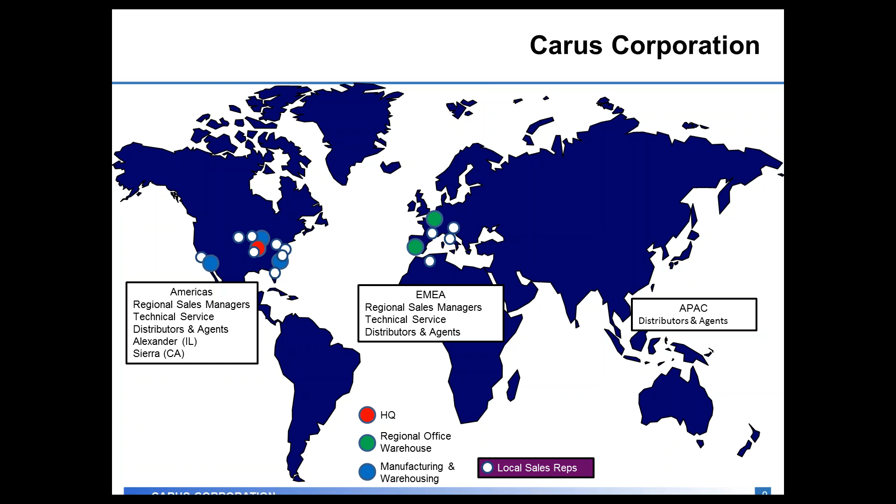So the rule that governs what we're going to talk about today is the US EPA lead and copper rule that was put into effect on June 7th of 1991. What it said at that time was what the current action levels for lead and copper would be. At the time, the lead action level was 0.015 milligrams per liter, or usually you'll hear it referred to as 15 parts per billion. And for copper, the action level was 1.3 milligrams per liter.

That original document actually set goals as well and said the maximum contaminant level goals for those two compounds. For lead, it was 0, and copper was 1.3. So in the case of copper, the action level and the goal were the same, but with lead, it said that the action level was 15 parts per billion, while your goal would be 0.

With the recent news with Flint in the last 2 years in the media, you've heard many people say that there's no acceptable level of lead. Well, they're using this old document and the goal and saying that the goal was always supposed to be 0 to say that's why none would be acceptable in the field.

The reason the lead and copper rule was put into place was because of the issues that lead causes in the delays of physical and mental development of children. It can also cause kidney problems and high blood pressure in adults. Copper causes stomach, liver, and kidney problems. So there were reasons behind putting the lead and copper rule into effect.

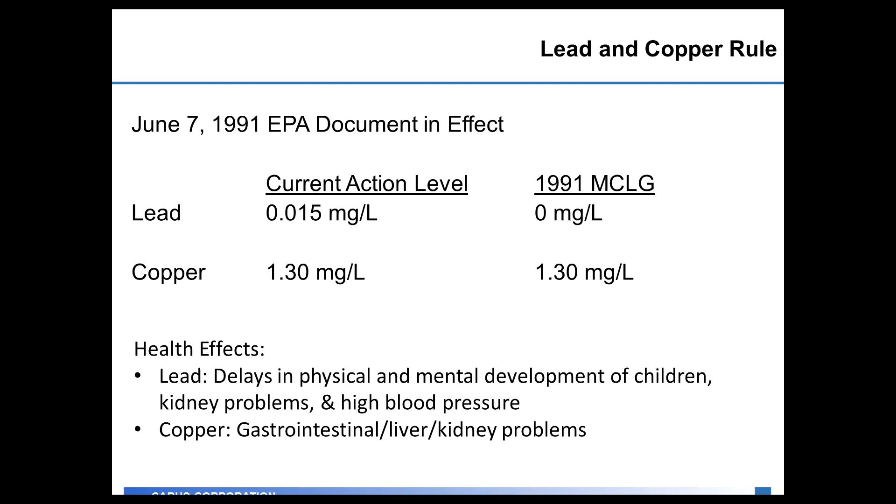The lead and copper rule is different from most regulations because it's an action level, which is different than a maximum contaminant level. In the case of an MCL, you can have no sample that's above the limit. In the case of an action level, you only need 90% of your samples in the distribution system to comply with the regulation. You're allowed to have 10% that are above the regulation.

So the easiest way when you're doing your lead and copper rule numbers is to take all those samples, put them in a spreadsheet, sort them from highest to lowest, and go 9/10 of the way up the list, and that's what your action level is, and that determines if you're in compliance.

The monitoring for the lead and copper rule is based on the size of the distribution system and the high-risk sites that you have out in the distribution system. High-risk sites would be places where you know you have lead service lines or you have copper plumbing in the consumer's home that has lead solder.

The original frequency is every 6 months for additional monitoring of the lead and copper rule. If you meet the action level, systems consistently meeting it can reduce the monitoring to once a year. If you continue to meet the regulation, you will then cut your number of samples in half. And then finally, as you continue to be in compliance, it goes to once every 3 years and half the number of samples that you need to pull in the system.

So there are benefits of getting the lead and copper in your system under control because it's less testing and half the number of samples.

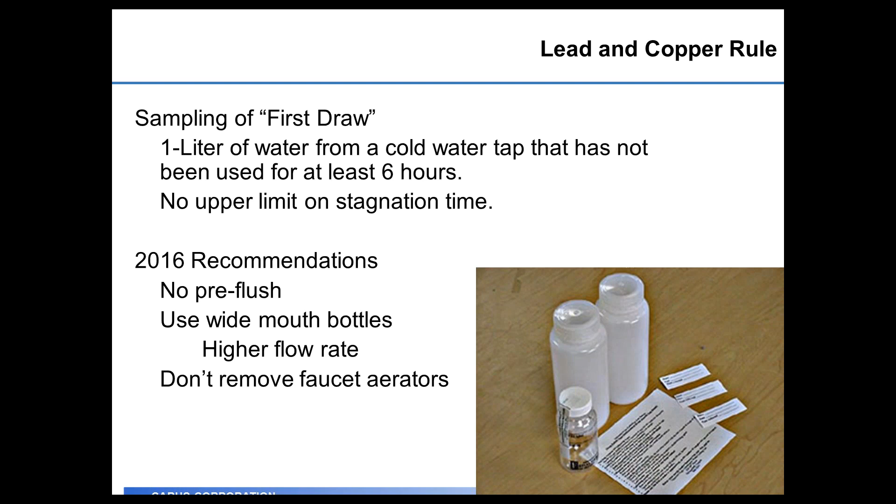And then finally, they recommend that you don't remove the faucet aerator from the consumer's tap before they pull that sample. You want the sample collected like they normally would when they wake up in the morning and drink from the kitchen or the bathroom sink. And those were the recommendations.

If you have a violation of the lead and copper rule, after the exceedance occurs, you need to do a distribution of public education, so notifying the public that you've had that exceedance. What happens is you go back to increased monitoring of consumer taps. So you go back to monitoring every 6 months and the full number of samples. In addition, you're required to develop and submit a corrosion control plan to your state regulatory agency of how you're going to get back into compliance.

That corrosion control plan can include how you would adjust the pH, the alkalinity, the hardness, or if you're going to add a corrosion inhibitor or change the dosage on the corrosion inhibitor. The lead and copper rule also lays out that you can choose an alternate way of compliance of doing lead service line replacement rather than doing a corrosion control plan.

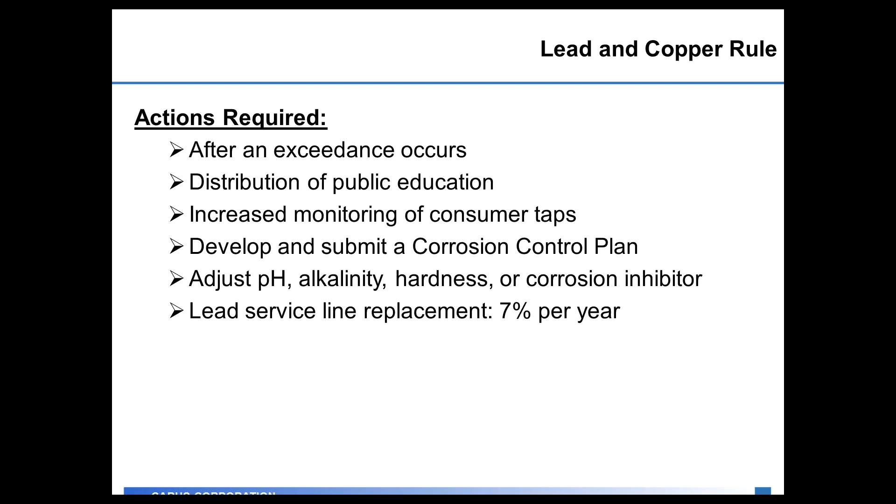If you choose the path of lead service line replacement, the regulation states that you must replace at least 7% of the lead service lines per year until you have them all removed from your system as a path forward. All these things will be up for debate when the new US EPA lead and copper rule comes out. It's tentatively set to be released in early 2018.

Are you seeing an increased cost to pumping water through your pipe? As that pipe gets restricted with scale and tuberculation, it costs you more in energy to pump the same amount of water through the pipe when that scale and tuberculation builds up.

Do you have an increased chlorine demand in your distribution system? You're feeding your chlorine at the plant. Do you have to boost it out in the distribution system to maintain that residual in the system? Do you have places where the residual drops off frequently? Those are all good hallmarks that you might have issues with corrosion in that part of the distribution system.

Have you had any issues with bacterial regrowth or hits with bacteria out in the distribution system? Bacteria can be a major form of causing corrosion out there in the distribution system. Do you have a lot of issues with dirty water, red water complaints in the distribution system, and you're sending your team out to flush the fire hydrants frequently?

And when they do that flushing, do they have to flush the fire hydrants for 5 minutes, 10 minutes, 30 minutes? The longer that you have to flush the fire hydrant until you get clean water is a good hallmark that you have a lot of corrosion going on out in your distribution system. Obviously, leaks and main breaks would tell you you have severe issues with corrosion in your distribution system because now the pipe is actually corroded so much that it's caused a crack and you're leaking water out into the ground, and you have to do replacement of those.

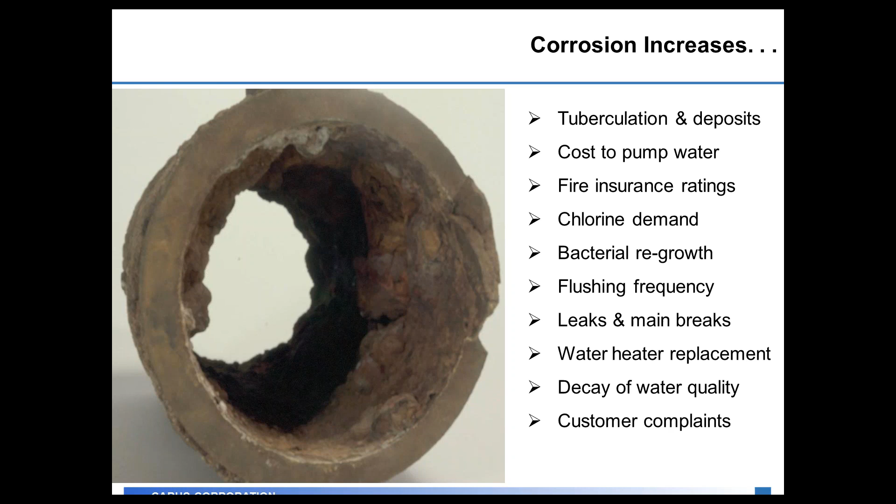In addition to pH, alkalinity is another important factor to measure. Alkalinity helps you form the calcium carbonate coating out in the distribution system, and it also acts as a buffering agent for your water, which helps you keep your pH at a stable level throughout the distribution system. Systems that have low alkalinity typically can see pH swings in the distribution system, where water leaving the plant will be at one pH, and depending on what's going on in the distribution system, it'll either swing higher or lower depending on what type of corrosion byproducts they have in the system.

Some other products you'll look at is DO, dissolved oxygen, which would increase the rate of corrosion in your distribution system. Chlorine residual, or nowadays you also see chloramine residual. Chlorine residual specifically increases metallic corrosion in the system, and chloramine residual is less effective at removing biofilms from a distribution system versus free chlorine. So there can be differences in how those work in the distribution system.

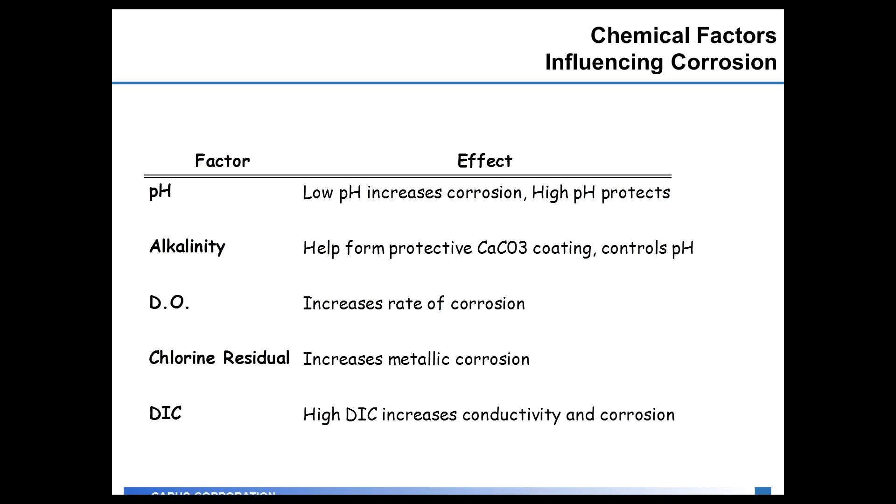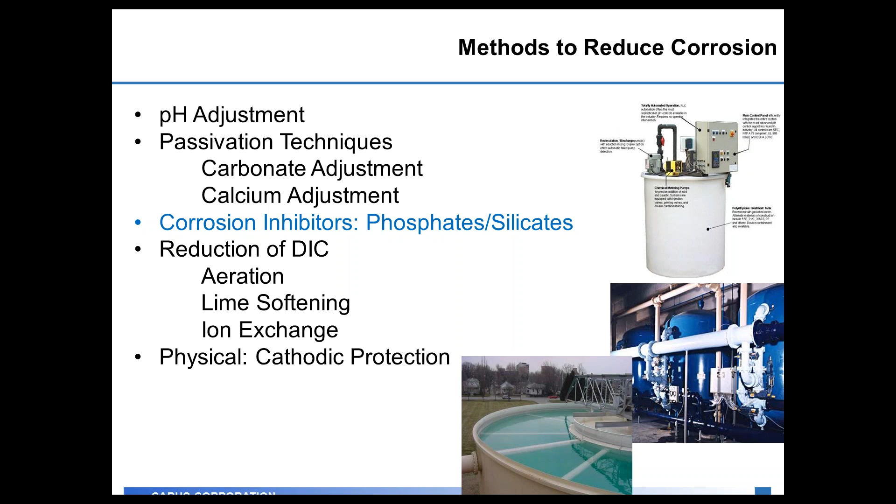Generally, phosphates in water treatment are used for two main applications. They're used for corrosion control, which would be lead and copper, and also red water complaints. And they're also used for sequestration, which would be color control, scale control. The last time that AwwaRF did a study on this was in 2001, and 56% of all water utilities in the US use some type of phosphate-based corrosion control / sequestration. At that time, they said roughly $200 million was spent a year on phosphate products, but it resulted in a $4 billion savings for these water plants, which was a 20-fold return on investment.

How AwwaRF came about those numbers was they had the cost of the phosphate products, but to get the savings, they added up all the things that a water plant would normally do when responding to a customer complaint. This could be going out and collecting water samples, the additional testing they would do, the other treatment chemicals that they would use in the plant. Did they have water mains and leaks? Did they do more flushing? All those things have a cost associated with them, and they added those up, and that's how they came to the $4 billion in savings.

At the time of the study, and even today, there's a wide range of costs for phosphate products in the market. Depending on what type of phosphate you're using, the cost can be anywhere from 30 cents to $2 a pound, or 1 cent to 10 cents per 1,000 gallons of water treated.

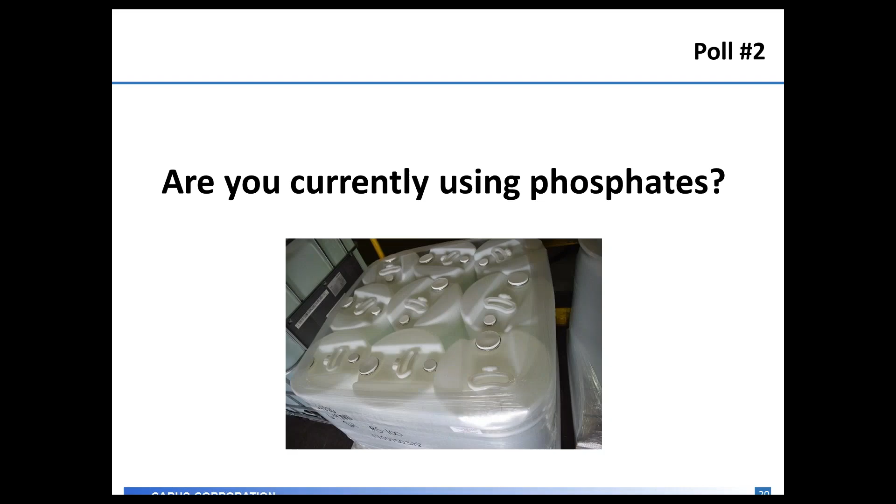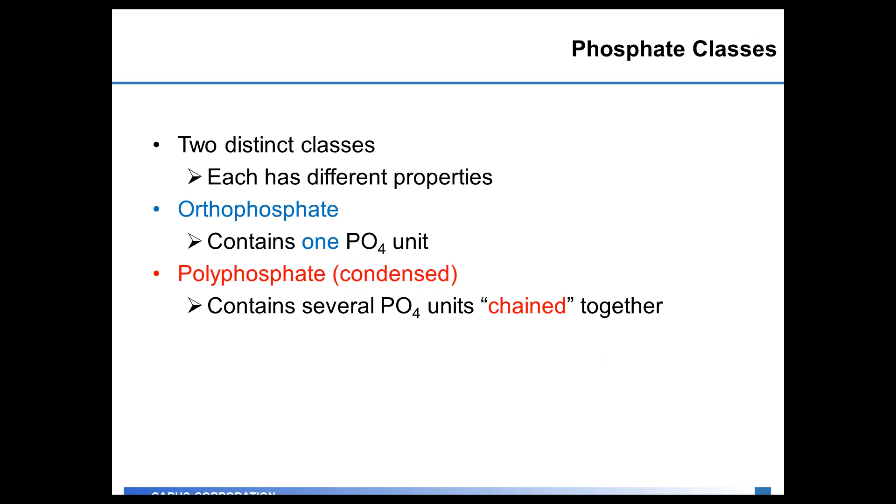So when we talk about these phosphate classes, there's two very distinct classes. Orthophosphate, which contains one PO4 unit, and polyphosphate, which is also sometimes referred to as condensed phosphate, which contains several PO4 units chained together. So orthophosphate, like I said, is just one PO4 unit by itself.

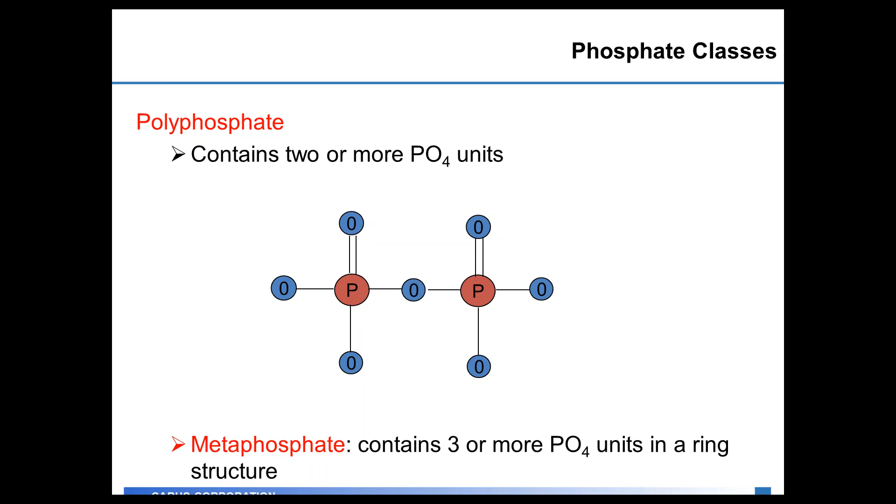There's been a lot of research done over the years on the corrosion control mechanisms involved with phosphates. What we do know is that phosphates form films over pipes or metals out there in the distribution system. They are anodic film formers. So the orthophosphate is slightly negatively charged and forms a film on the inside of the pipe by attaching to the metal.

Polyphosphates can also act as a cathodic inhibitor, and they provide a barrier between the metal pipe surface and oxygen to prevent that interaction of the oxygen with the metal pipe surface. The research has shown that these thin films are very insoluble phosphate salts, and we are still doing research today on how these films form, how long they stay active, and what are good levels of phosphate to feed in the distribution system.

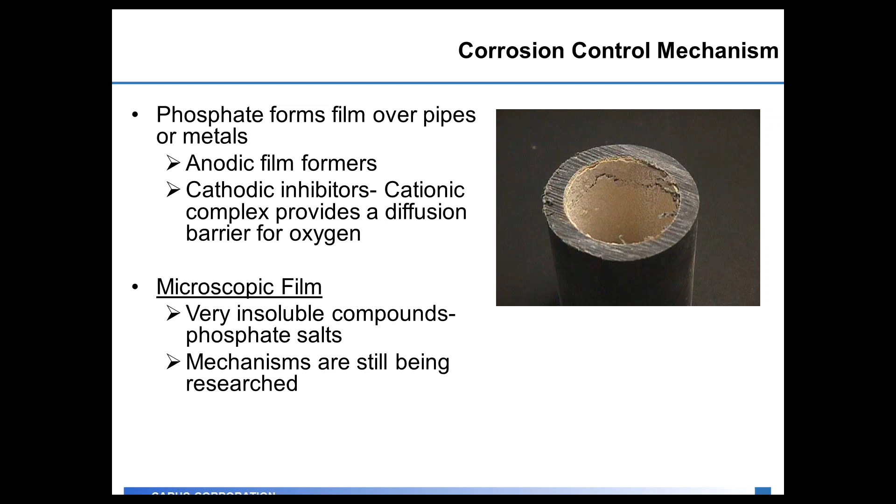The orthophosphate research that you can find out there today talks about orthophosphate precipitating with the 2+ valence metals. So that would be the calcium, the magnesium, the lead and copper pipe, and the iron and manganese you would have in your distribution system. Michael Schock did a lot of the original work on the formation of the insoluble film out in the distribution system. What we know is that we bond directly with the pipe wall itself or with some of the soluble ions in the drinking water itself.

As little as 1/2 part to 1 milligram per liter as orthophosphate reduces the amount of iron that releases from cast iron pipes by 2/3. But overall, the orthophosphate research shows that they reduce corrosion in the distribution system and would lower your lead and copper numbers and red water complaints.

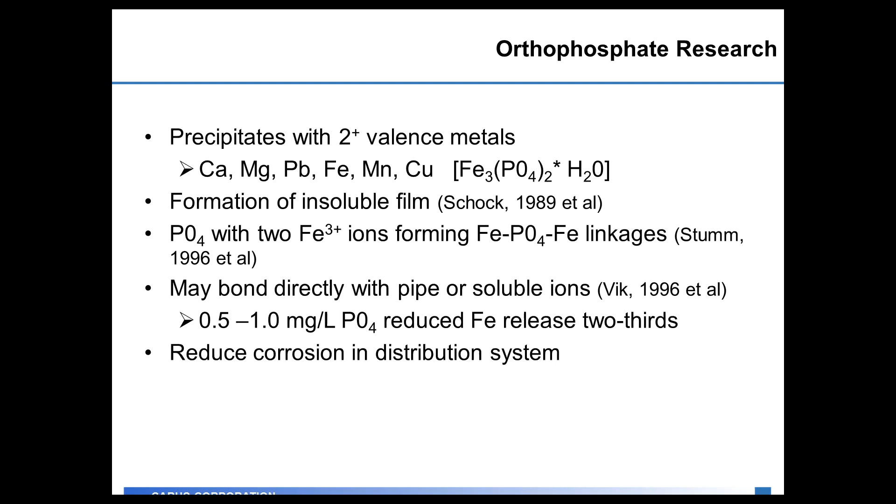A typical optimal orthophosphate dose would start at least 1/2 milligram per liter as orthophosphate to reduce lead and copper solubility in a pH range of 7 to 9. The current EPA guidance manual talks about feeding up to 3 milligrams per liter. That is because once you get above 3 milligrams per liter as orthophosphate in the distribution system, it yields little change in the reduction in lead and copper that you would see in the distribution system.

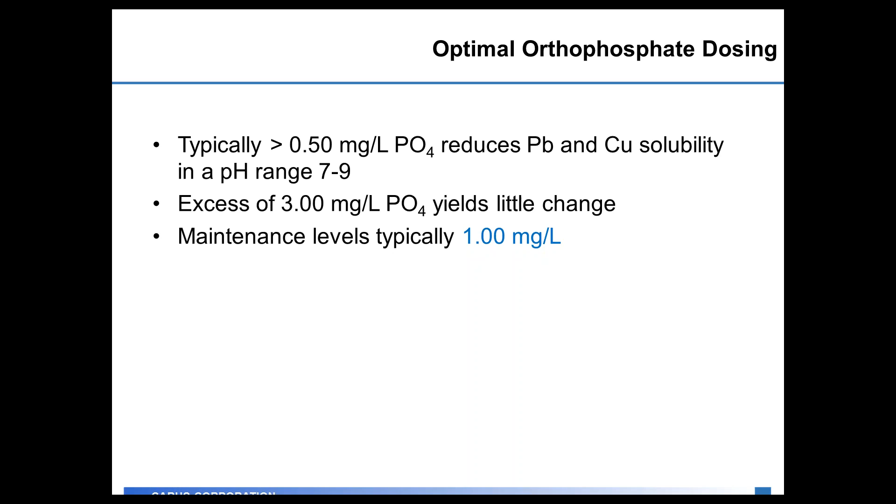Typically, most water quality plants will maintain a level anywhere from 1/2 part to 1 milligram per liter if they're just feeding an orthophosphate product to the distribution system. That's important to keep in mind because a lot of customers are feeding blended phosphates which contain ortho and poly, and that 1 milligram per liter would only be normal if you're just feeding orthophosphate with no polyphosphate present.

Polyphosphates are known as the sequestering agent in the distribution system. They bond the polyphosphate to the metals in your water. What they do is prevent chlorine, which also acts as an oxidizing agent in addition to being your disinfectant in your distribution system, from oxidizing them. Typically what happens is chlorine will oxidize the iron and manganese in your water and precipitate it out of solution. If you have iron, the water will become rusty orange as it gets oxidized, and if you have manganese in your water, it will become black to brown depending on the concentration.

So when we talk about color control and the use of polyphosphates for sequestration, typically you would use it for iron and manganese sequestration if you're above the US EPA secondary maximum contaminant levels. Those secondary maximum contaminant levels are aesthetics, not health effects. Water that contains iron above 0.3 milligrams per liter and manganese above 0.05 will cause staining of fixtures and laundry in the consumer's home. If you're above those levels in the water that goes out the door to the consumer, you would use a polyphosphate to sequester them so they don't precipitate out and cause those color issues in the distribution system.

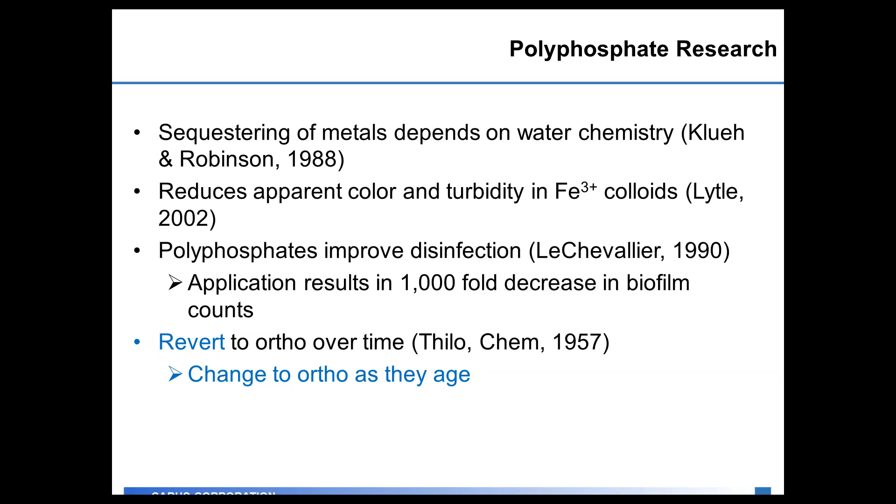Typically, optimal polyphosphate dosing is going to be based on how much iron, manganese, and calcium carbonate hardness you have in your water. Typical dosages are anywhere from a half a part to 4 milligrams per liter, and the dose is going to really depend on how much stuff you have to sequester.

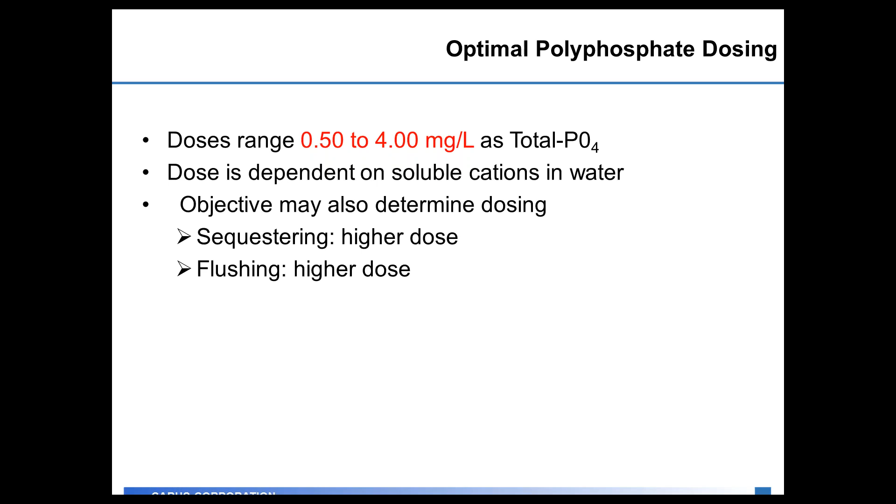So the combination of poly and ortho blended phosphates became very popular in the 1990s when the lead and copper rule came about. A lot of plants, especially groundwater plants, had to do both sequestration and corrosion control at the same time. So they chose products that combined both poly and orthophosphate to give them both of those benefits at the same time. They would provide the corrosion control they needed to meet the lead and copper rule, as well as sequestering the iron, manganese, and calcium carbonate in the distribution system.

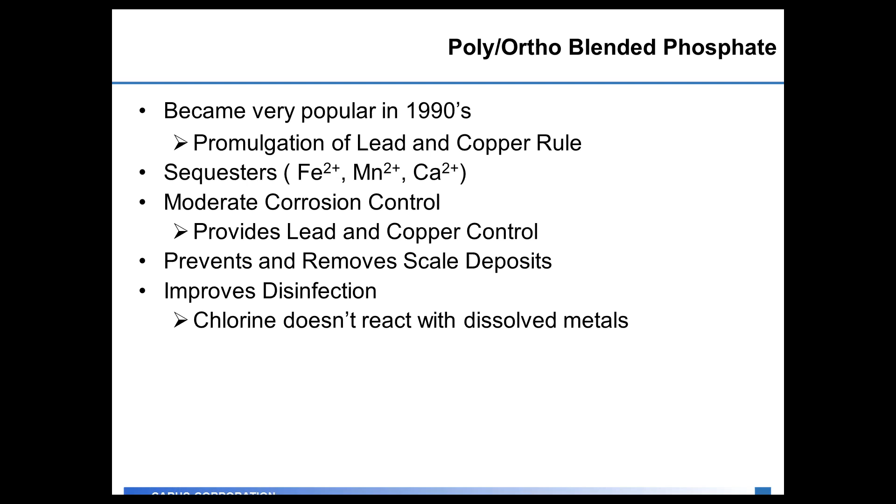The doses for an ortho-poly blend are a combination of the two dosages you saw earlier. Typically, you'll see anywhere from a 1/4 part to 1.5 parts as orthophosphate, and then anywhere from a half a part to 4 milligrams per liter as total phosphate. The difference between the total number and the ortho number is how much polyphosphate you would have in the system.

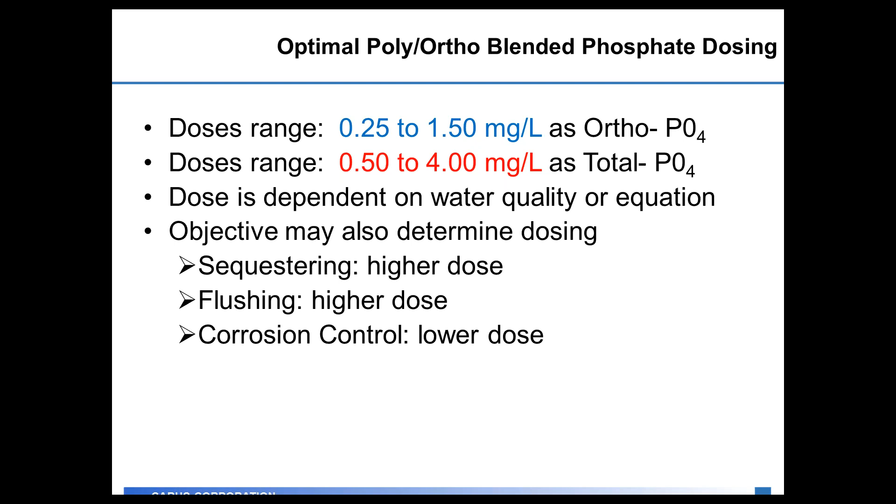Your dose is going to be dependent on your water quality for your situation and what type of blend you are using. So typically higher dosages would be if you're sequestering in the distribution system, and if you're just looking at corrosion control, then you would typically be on the lower end of that scale for dosages.

Which choice of phosphate to use can be as critical as dosing. Some of the things you want to consider when picking a phosphate product for your specific water quality is what is the water quality leaving the plant going out the door, and then what does the water quality do as it goes throughout the distribution system. Then what types of problems are you having in the distribution system? Are you mainly having calcium carbonate scaling issues? Are you having issues with dirty water, red water complaints in the distribution system?

And then finally, what are the treatment goals that you're trying to achieve with the phosphate product? Are you mainly looking at lead and copper control? Are you looking at lead and copper control plus sequestration? What are the goals that you're trying to achieve with the product you pick?

Typically, the first things you're going to want to determine are what is the hardness of the water, what is the soluble iron and manganese after filtration, if you have filtration, going out the door to the consumer, and keep in mind that there are the secondary maximum contaminant levels for iron and manganese. Do you have any background orthophosphate? If you're a groundwater source, sometimes you will find that in your source water. You need to take that into account.

And then what is the pH of your water going out the door to the distribution system? For a blended phosphate of ortho and poly, pH 6 to 9 will work, but it's optimal between 7 to 8. If you're using a zinc orthophosphate, a pH of 7.3 to 7.8 is optimal. So those are some of the things you need to take into account. In general terms, to give you an idea of where you would start with a phosphate product:

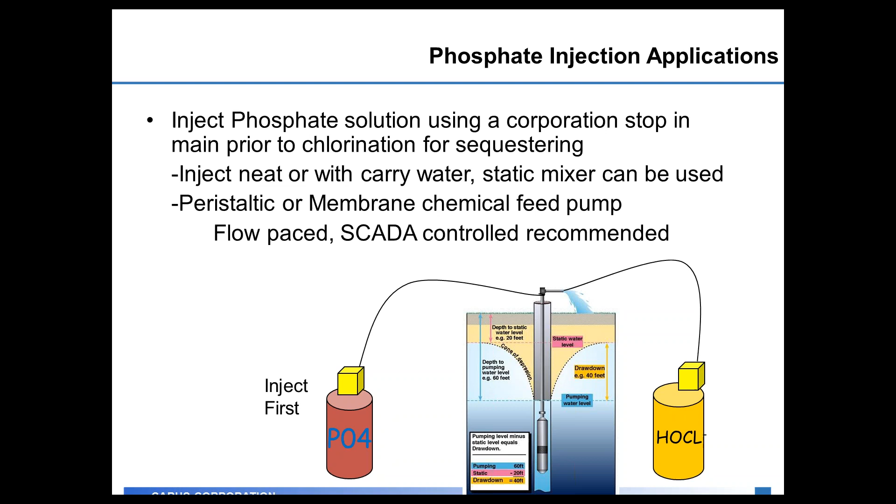Once you start feeding the phosphate, you can monitor how the phosphate is working in your system by measuring the orthophosphate levels in your distribution system. The US EPA has an approved method that you can use, and it measures orthophosphate residual in milligrams per liter. So while you're collecting those samples for chlorine in your system, you can split the sample and use a portion of it for the orthophosphate test.

You add the powder pillow, you let it wait for 2 minutes, and the darker the blue the sample takes, the higher the orthophosphate content you'll have in your system. This is a way for you to measure what type of orthophosphate you're feeding and how much is making it out into your distribution system, to give you an idea if the numbers match what you're feeding and what you're seeing in your distribution system.

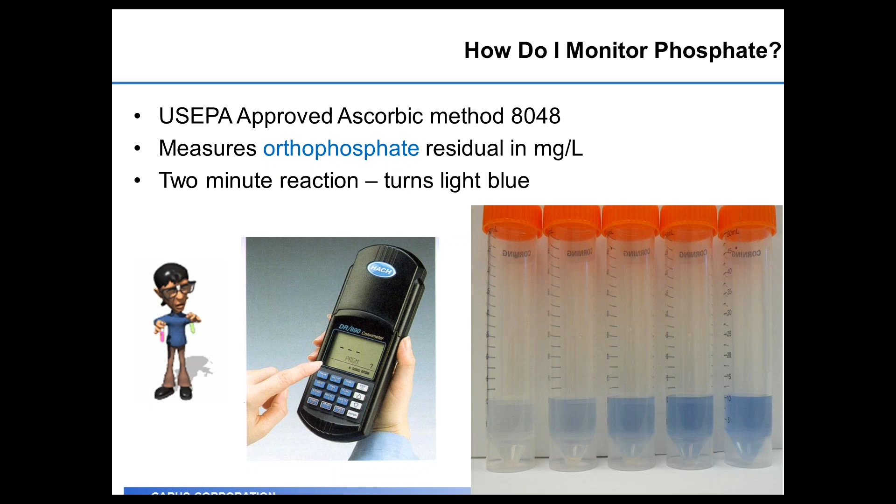So in summary, phosphate use in the US is pretty extensive, anywhere from very small systems, groundwater plants, to very large municipalities like the city of Chicago, Los Angeles, and Miami. Generally, the benefits are worth the cost. Obviously, if you're failing the lead and copper rule, they can help you get back into compliance with that regulation. They can also help have cleaner, clearer water for sequestration out in the distribution system. They can reduce the amount of time you have to flush in the distribution system, and they can cause reduced disinfectant demand in the distribution system. But overall, the use of phosphates leads to better water quality in the system.

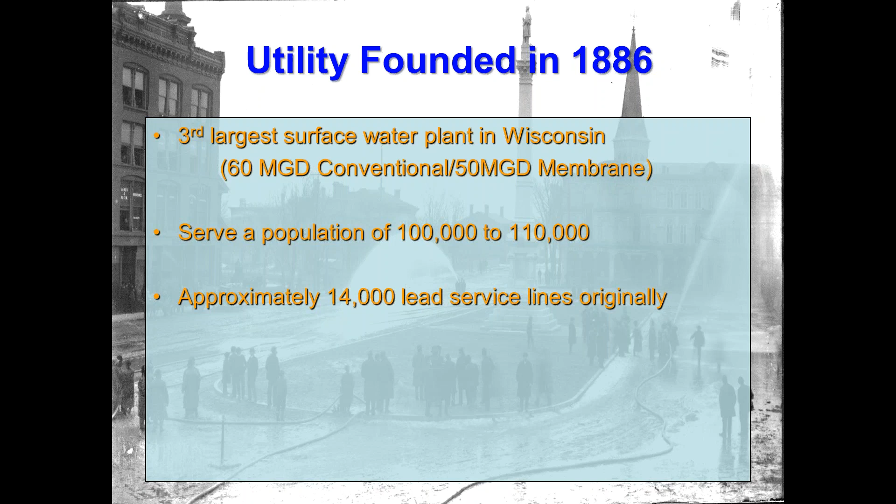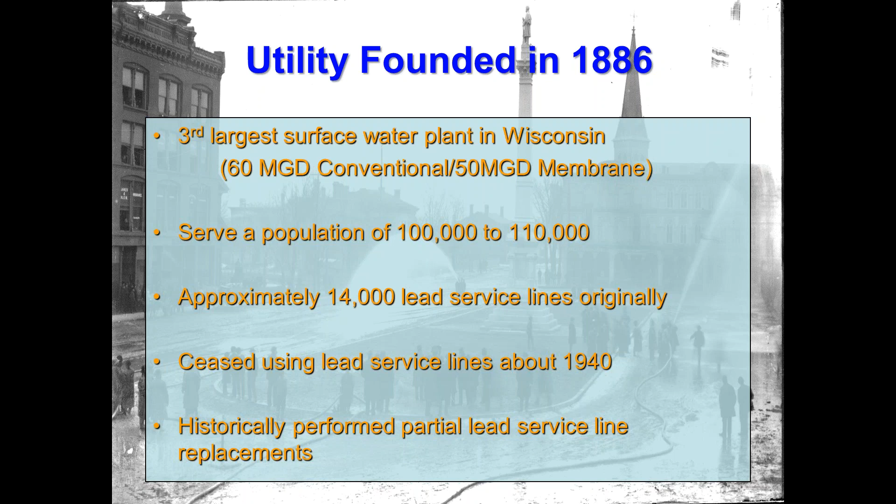We started out with approximately 14,000 lead service lines, probably about 2,000 to 3,000 less than that right now. We stopped using lead service lines in around 1940, right before World War II. And historically, we've been performing partial lead service line replacements as we do water main projects. Again, that's kind of a no-no. Obviously, now with what's done in research and the potential for elevated lead levels, we've received some grant money the last couple of years from the Wisconsin Department of Natural Resources to help our private citizens to replace their side of the lead service line, and we're progressing with that quite well. So where we can, we do full lead service line replacement.

I started in the water industry back in 1984, and looking at lead and copper, unfortunately, about 32 years of my experience have been dealing with the lead and copper rule in some fashion. It was first promulgated in 1986, and when it was, the previous superintendent here and I conducted a lot of research. We trained a number of our employees that had lead service lines, and we did some pH adjustments and alkalinity adjustments like Darren has suggested.

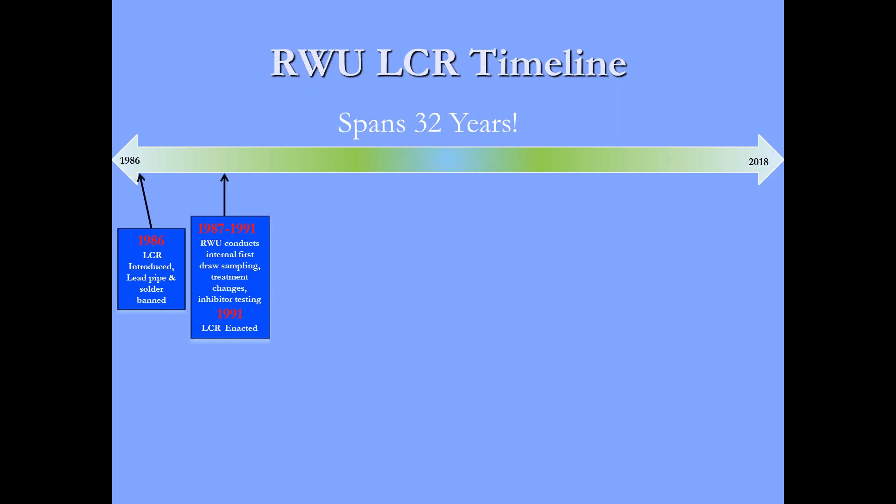Took first draw water samples at about 12 individual homes over the course of each quarter of the year, trying to account for temperature effects in that. Again, we did that from 87 to 91. In 92, monitoring began across the country. And since we were a large utility, we were mandated to do corrosion treatments, which we did beginning in 1993. It took us until 1996 where we deemed that we had met the action level and had achieved corrosion compliance. And we sailed along in compliance, barely in compliance, I'll add, until 2004.

And we exceeded the lead action level, unfortunately, which of course initiated a lot of things like public education, studying what we're going to do. So we kind of remained out of compliance for 06 and 07. In 08, we made a treatment change, which I'll talk about later. We changed our main coagulant, and we came back into compliance in 08. We changed our corrosion inhibitor formulation in 09, further improving our lead and copper numbers. And we continued through 2011, meeting all the action limits with flying colors, basically.

And then 2014 hit, and there's some theories as to what happened, which I'll again talk about a little bit later in the talk. We were out of compliance again, which initiated public education, of course, and initiated the necessity to start removing or replacing lead service lines, which again I'll explain a little bit further. In 2015, we did a lot of extensive lead testing. We also came back into compliance in 2015, and for the last 2 years, 16 and 17, our numbers have been excellent as far as our 90th percentiles for lead and copper.

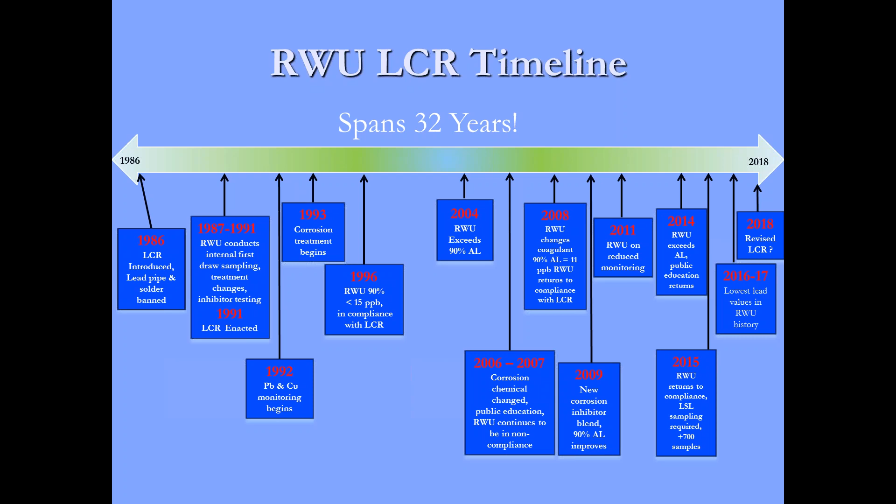In 06, we changed our chemical supplier and started using a Carus product, a 40-60 blend, 40 ortho, 60 poly, and carried on that way through a few years, again, with no success in reducing ourselves back down below the 15 part per billion action level, unfortunately.

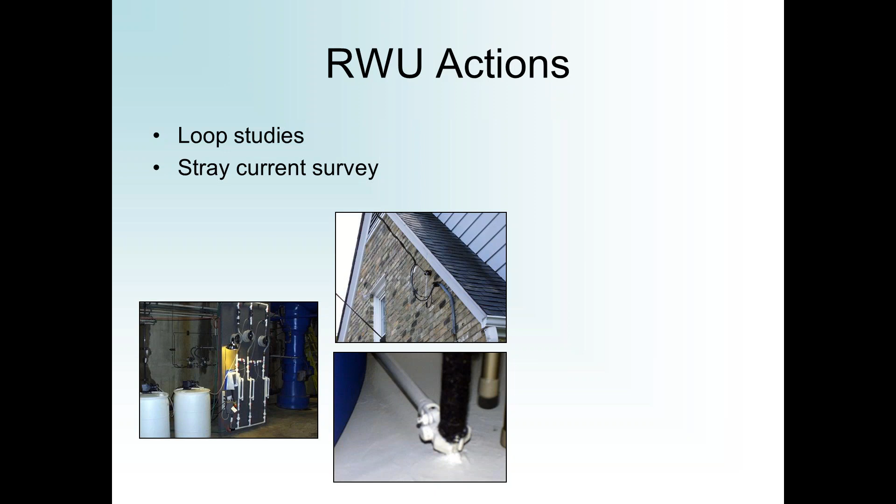During that time period, we were required to do an investigation. We did loop studies looking at different chemical formulations as to what would be the most effective. We were out in the system doing surveys on our homes where we do our monitoring, looking at stray voltage and grounding effects. Obviously, most of the homes in an older city like us have all the appliances grounded to the water pipes, which is obviously not best practice. And we found very little correlation between stray currents and grounding effects as to what the lead and copper would be. So again, we tried, but we didn't really see any strong correlation.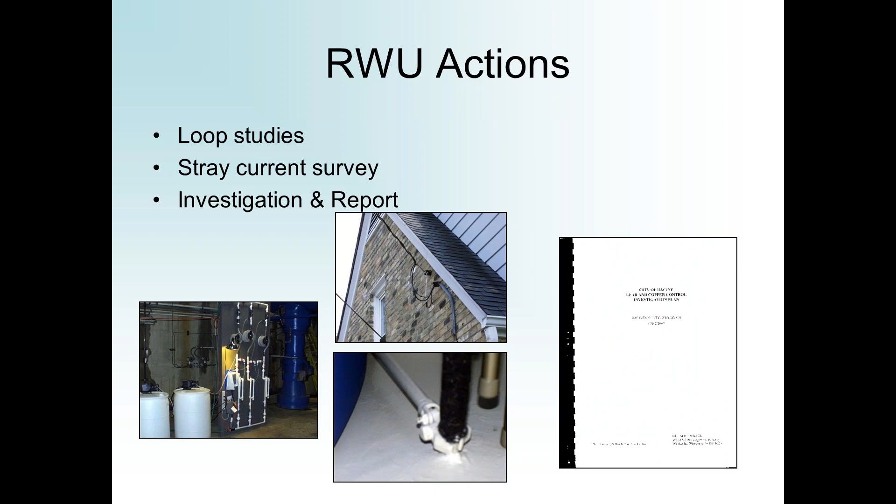And of course, we had to produce a report submitted to our DNR to give recommendations as to what we were going to be doing in the upcoming future to get ourselves back into compliance. Again, very, very involved work at this point. A lot of man hours put in.

But in 2008, again, we're sampling twice a year, a minimum of 100 samples in each half of the year. Our 90th percentile dropped down to 11, which is one of the better numbers that we have seen. So what happened in 2008? Well, we made a coagulant change. We had been using iron coagulants, ferric chloride and then ferric sulfate, from the years 1987 through 2008.

We decided that we wanted to look at an alternative product, did jar testing with a chemical supplier, got DNR approval to do a plant trial, and we switched from ferric sulfate to polyaluminum chloride. And the goal, our intention for making the switch, has nothing to do with lead and copper.

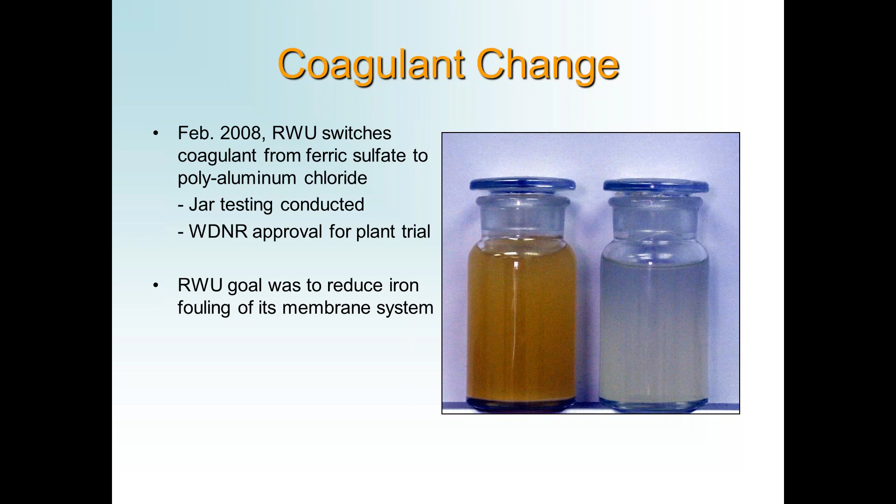It was strictly resulting from the fact that in our membrane plant, the fouling that was occurring on the membranes was due to iron carryover from the conventional treatment process, clogging the pores of the ultrafilters. Even though it's very low levels of iron, basically undetectable, there were still small particles of iron precipitate that you couldn't see that were clogging the pores on the membrane. So the idea here was to increase the efficiency of our membrane plant.

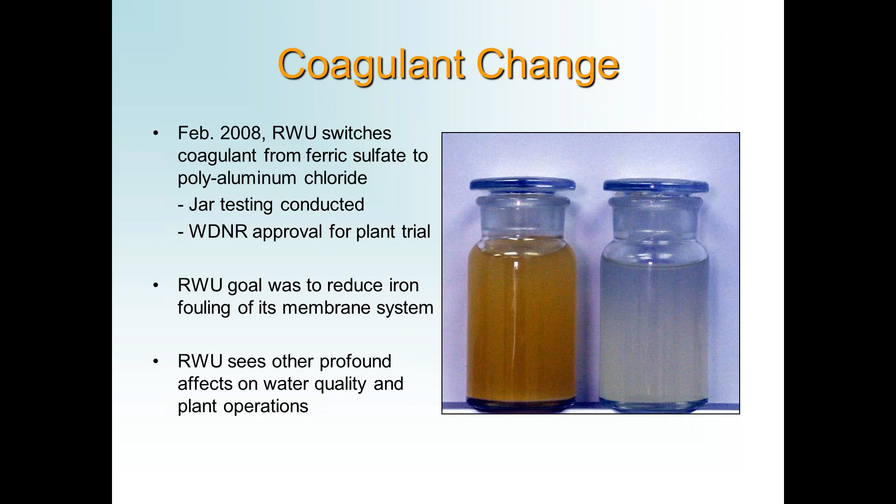Fortunately for us, we found out that the switch over from the iron salts to polyaluminum chloride provided a number of other benefits in our treatment process and effects on water quality. And one of the things we noticed was the effect of pH. Historically, Racine had been an alum plant. We switched in 1987 from an alum to an iron salt.

The other thing that happens when you treat the water from Lake Michigan: the alkalinity of Lake Michigan is about 110 parts per million. And through the treatment process, we would typically depress the alkalinity by about 10 parts per million, especially when we were using the iron salts. When we switched over to the polyaluminum chloride, less alkalinity depression, so our alkalinity leaving the plant was raised by about 5 parts per million. So this switch over in coagulant, not even looking at water quality, we wanted to reduce the fouling rates in our membrane plant, resulting in a less corrosive water.

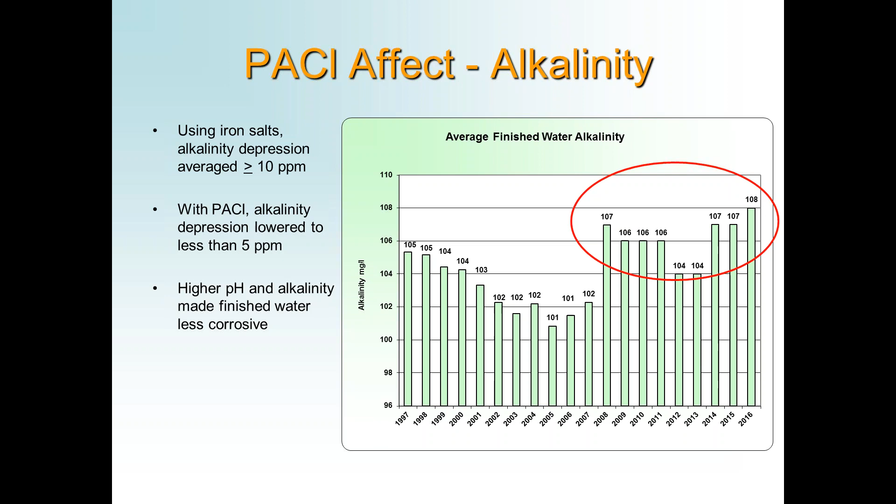So we like to believe what the evidence shows us, that even that slight change in pH and slight change in alkalinity brought us back in compliance. It was just enough to force the phosphates to work better. Looking at 2009, you can see our 90th percentile now dropped to 6.7, further improvement in the lead levels in our first draw sampling program.

And what happened in 2009 is, after our studies were completed, submitted to the Wisconsin Department of Natural Resources and accepted, we switched over to a blend of 8600, as Darren was explaining, their mid-level product, 70% ortho, 30% poly. And you can see looking at the numbers of previous years, going back in the 90s, we were carrying an average ortho level of about 0.25 parts per million.

In 06, when we changed to the 40-60 blend, you can see our orthophosphate went up to about 0.4 parts per million. And then with the switch over in 2009, we're looking at a target level of 0.7 ppm, and that's basically where we hit. So we basically almost tripled the orthophosphate level that we're carrying in our finished water out in the distribution system, which accounts for a lot of the improvement.

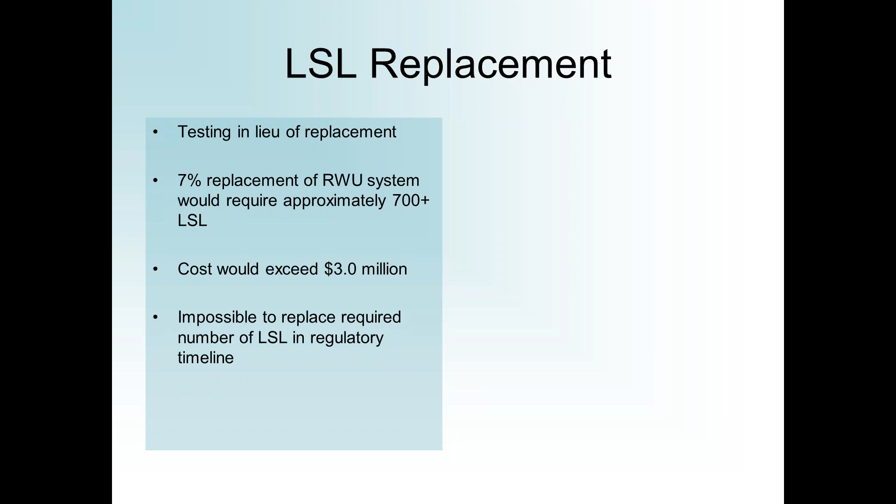And more importantly, it would have been impossible to replace 700 lead service lines by September 30th of 2015 as required in the lead and copper rule or the DNR regulations, which are the same. So we decided to test out of the program. We got a bunch of volunteers, actually 720 homes participated in a voluntary program to test for lead in the service line, not first draw, lead service line. Sample kits and detailed instructions were given to volunteers.

Again, looking at all the lead sampling we did that year, we processed nearly 1,000 samples for lead and copper in 2015. We did hire someone else. We couldn't do that internally. We didn't have the manpower to do this program, so we did contract a lot of this work out.

But one of the things we did learn is that since we knew we had sampling errors out there where people were not following sampling instructions, we looked in detail at our instructions to our samplers, our volunteers, and came up with this form where the sampler actually completes the survey. So in answering the questions, if there's any doubt about this water, we will not submit that sample, and we will go back to that person and have them resample.

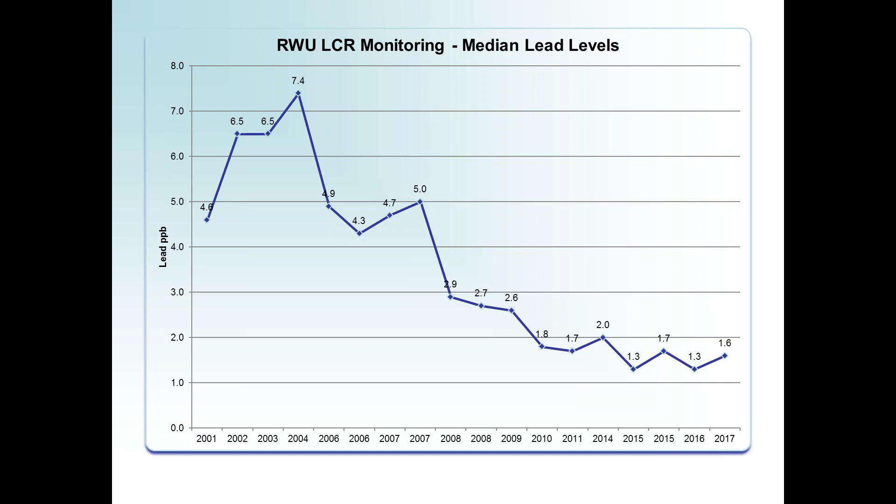And again, looking at a median value, this shows significantly that we've really made improvements in the overall lead numbers in our finished water and distribution water out in the system, where half the values are above this number and half of them are below. So again, looking at this, we're at 1.3, 1.6 in that range. So we feel, looking at these numbers, it's just further proof that the lead numbers have come down significantly due to what we've done here in our treatment process.

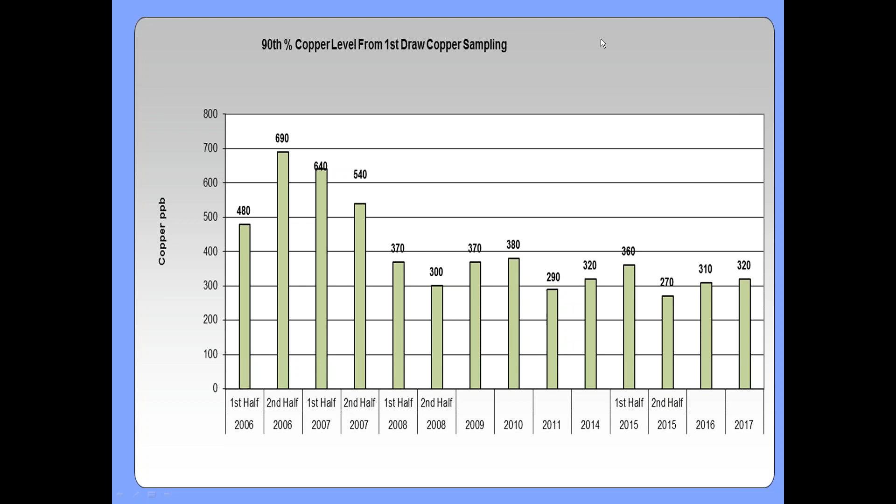Looking at copper again, we never really had some issues, but looking back at 06, 07, that time period, the 90th percentile of the copper numbers were a bit higher than what we are experiencing right now. So we're right around that 300 part per billion level at the 90th percentile. And I did not include graphs for median and average values, but they basically show the same thing for copper. We've never really had a copper issue here in Racine so far with the lead copper rule.

So points of emphasis: our average, median, and 90th percentile values continue to be some of the lowest for our monitoring history. Copper numbers are following the same trend line as the lead numbers. And of note, in 2017, is the first time we did not have any samples exceed the 15 part per billion action level. Actually, our highest value that we saw this year was 11 parts per billion. So we're very pleased where we stand right now with the lead and copper rule.